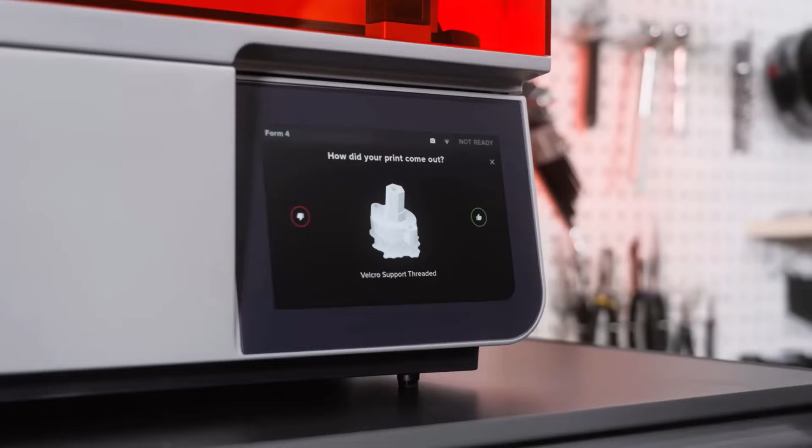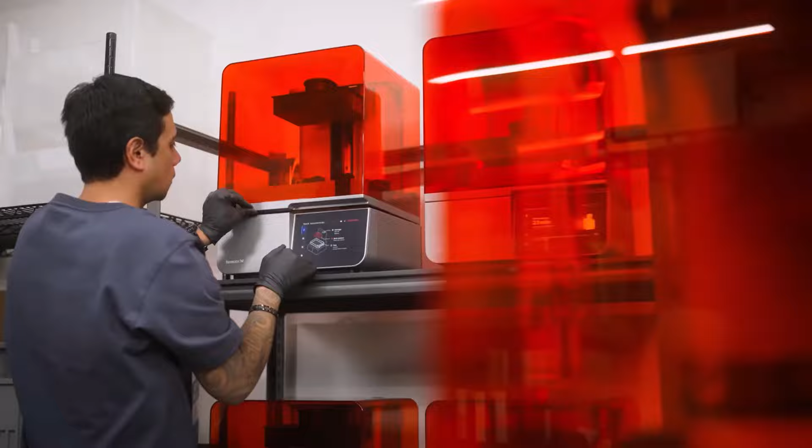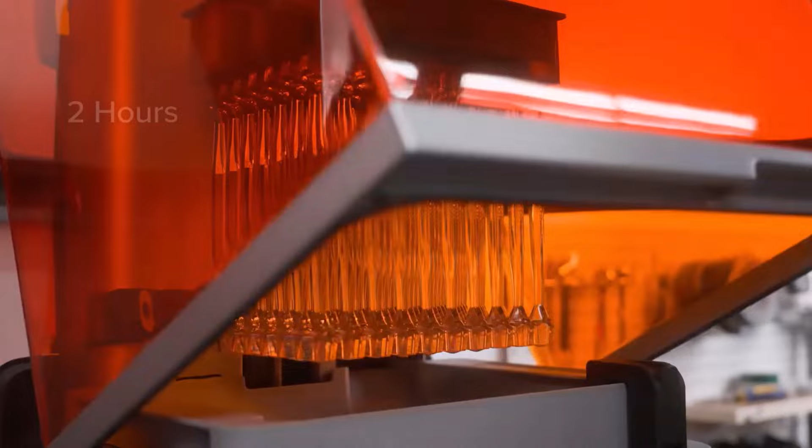Introducing Form 4. So fast, it will change the way you work, with most prints in under 2 hours. Iterate several times a day with a proprietary release texture, flexible film tank, and ultra-high optical power. Produce parts that always fit, rivaling injection molding with 50 micron pixels, advanced pixel smoothing, and light touch supports. Achieve an unmatched print success rate with validated print settings, precision heating, force sensing, debris detection, and remote monitoring. Tackle any problem with industry-leading materials, with an upgraded mixer and dispense system that support highly viscous and filled resins. And do it all with a workflow anyone can learn in 15 minutes, with instant material changes, comprehensive software, and automated post-processing. Enter a new era of performance, built on our next-generation low-force display print engine, featuring a high-power backlight unit, light processing unit 4, release texture, and a flexible film tank, delivering extreme speed, reliability, and print quality. Now, anyone can perfect their products, keep production running, or improve patient care. The tool you've been waiting for, Form 4.

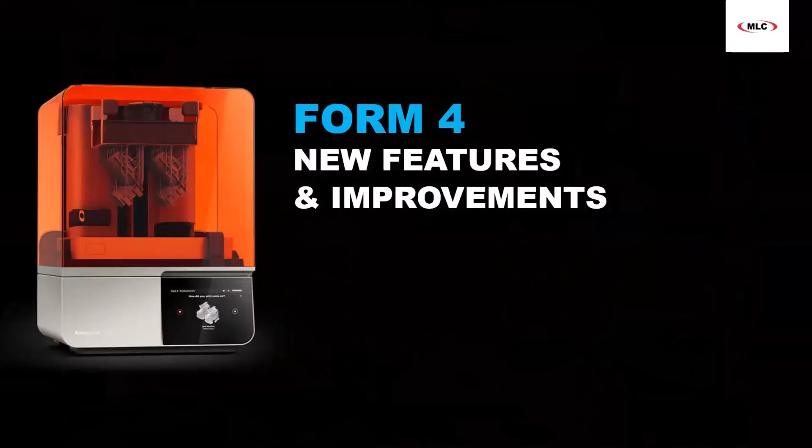So yeah, really good overview there. What I'd like to do is dive a little bit deeper into some of these new features and improvements with the Form 4. I think a great way to frame the perspective is by comparing some of these features with the previous generation printer, the Form 3 Plus.

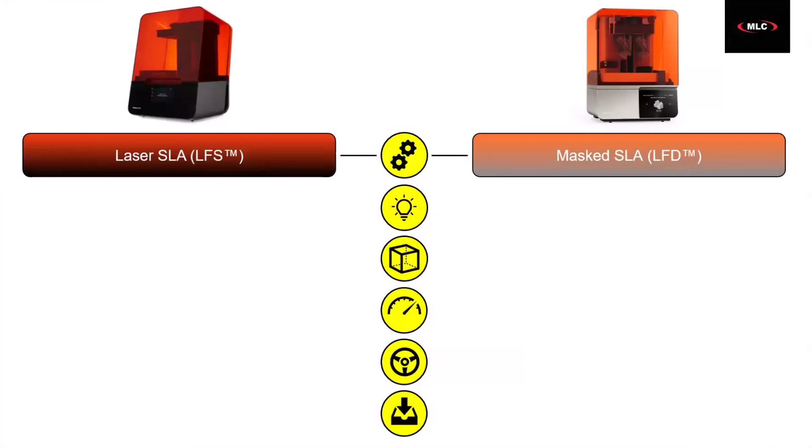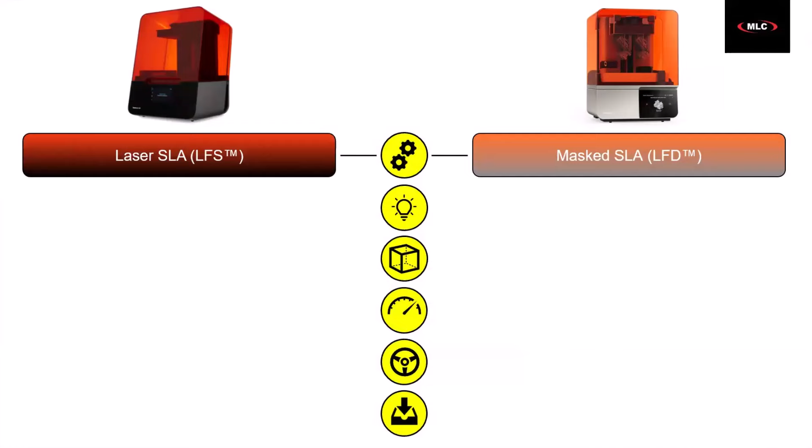So for starters, let's look at the print technology difference between these two machines. With the Form 3 Plus, we were looking at a laser-based SLA printer. And with the Form 4, we're looking at what we call masked SLA, or MSLA.

With the Form 3 Plus, it was a laser-based system of resin printing. So you had a laser that fired off, was reflected off a series of mirrors, and then it passed up through the bottom of a clear resin tank, and it cured that layer.

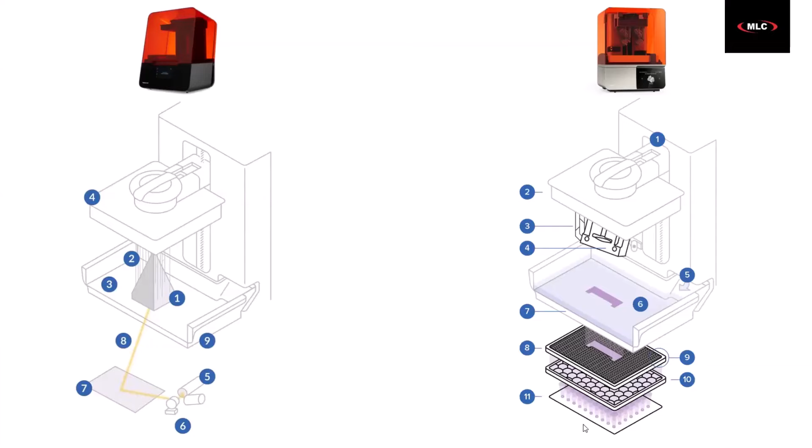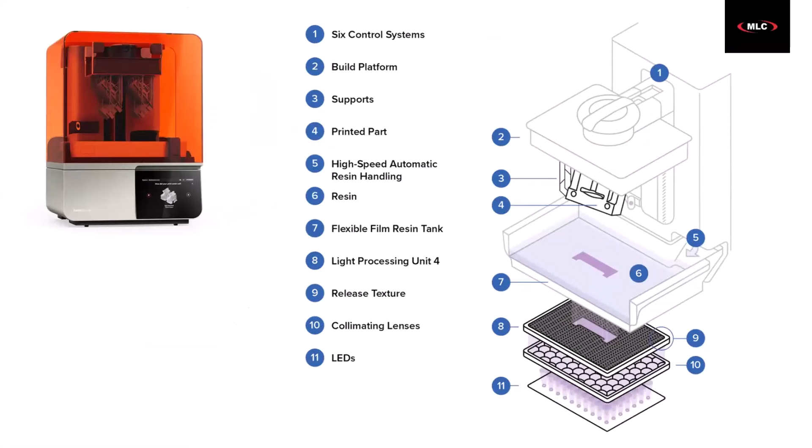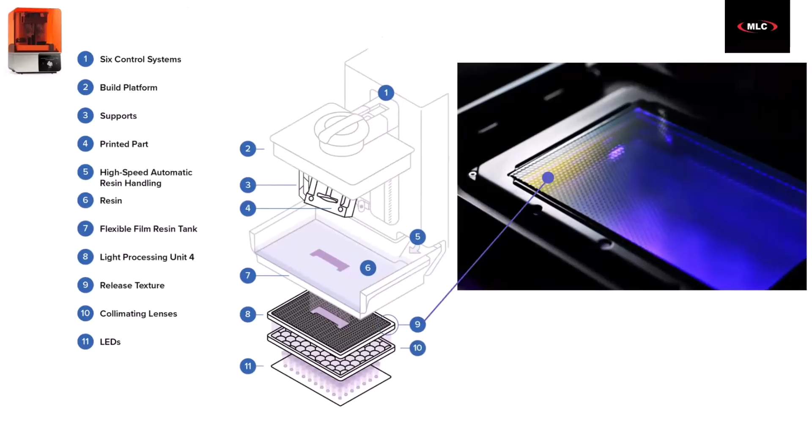So you can see that a little bit more clearly here. One thing I want to draw your attention to is this number 9 item, which says release texture. If we take a look at this here, this is a pretty brilliant innovation from Formlabs. The LCD screen actually has a rippled texture to it, kind of like a golf ball, if you will.

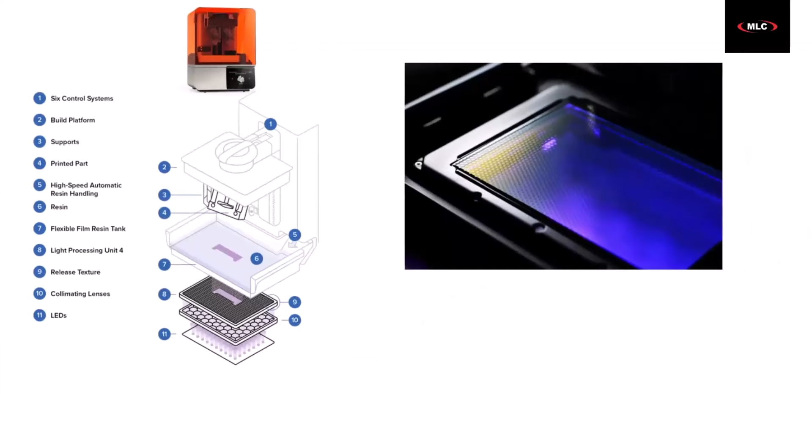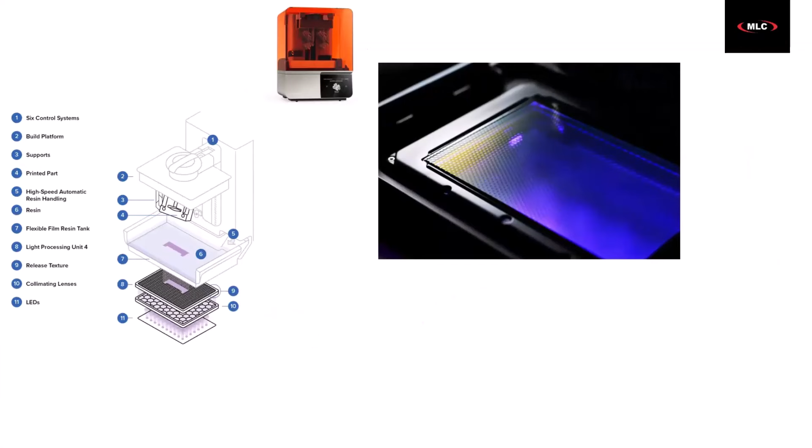And this is pretty significant because it has a pretty sizable impact on our peel forces. So if we look at a competitor's MSLA printer, usually one of these hobbyist grade machines, you can see their LCD screen is totally smooth.

So if we take a look at this from kind of a side view and a simplified diagram here, you can see that the rippled effect leaves these voids between the tank film, that clear tank film that rests on top of it, and the actual LCD screen itself. Versus the hobbyist printer, which just has two smooth surfaces in contact with each other.

The reason this release texture is important with the Form 4 is because during the print process, when this build platform lifts up, after the layer has finished curing, it'll peel that layer up off the bottom of the tank. And you can see this tank film is kind of warping, flexing during that peel process. And if we have two smooth surfaces in contact with each other, we can actually form a suction in between those two objects.

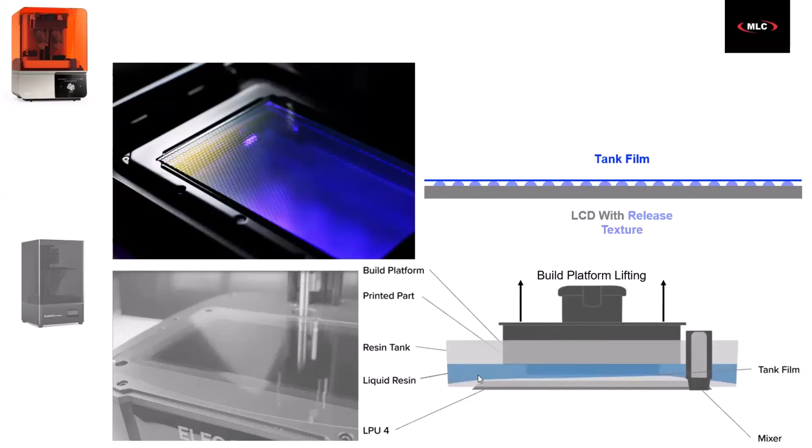This is analogous to a science experiment where if you place a piece of paper on a ruler and then throw an object on the end, the ruler will not fly off. The reason is because the piece of paper and the flat table form a suction between each other. So that paper is analogous to our tank film, and that smooth table is analogous to the very smooth LCD.

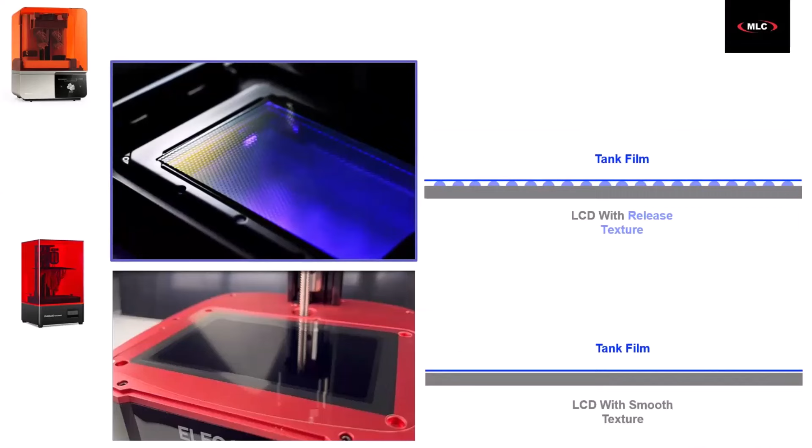So by implementing a release texture to the LCD on the Form 4, you get far lower peel forces than the hobbyist grade machines that have that smooth surface.

Now the light source, as we saw with the Form 4, is an array of UV LEDs, and our control point is that LCD screen. That LCD screen is a 4K LCD with 50 micron pixels. Before, with the Form 3, we had a laser that had an 85 micron spot diameter. So by controlling down to 50 micron pixel size, now we can obtain finer details, a smoother surface finish, and better accuracy on the Form 4.

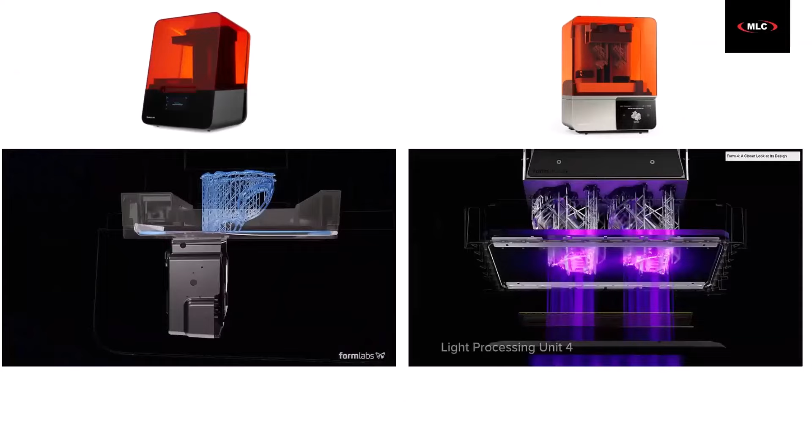Here you can really see the light processing unit differences in these rendered animations. Pretty incredible change of pace, and you get some great benefits with that masked version of SLA printing.

Now it's pretty impossible to not talk about build volume when a new printer gets released. So with the Form 4, instead of a 5.7 inch square build platform, you're looking at a more rectangular build platform. So you get extended dimension in the X, and you also get extended dimension in the Z axis.

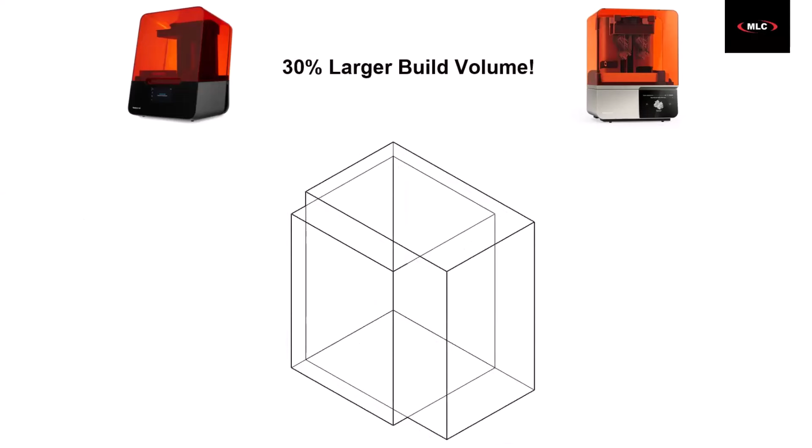If we take a look at our two wireframe representations of our build volumes and piece them together, you can see where you get that extended dimension. So 30% larger build volume as a result.

Now, one of the party pieces with masked SLA printing is the enhanced speed that you get. With Form 4, Formlabs has published that their average speed is about 40 millimeters per hour. So you're looking at 3.5 times faster speeds than what you got on the third generation of printer.

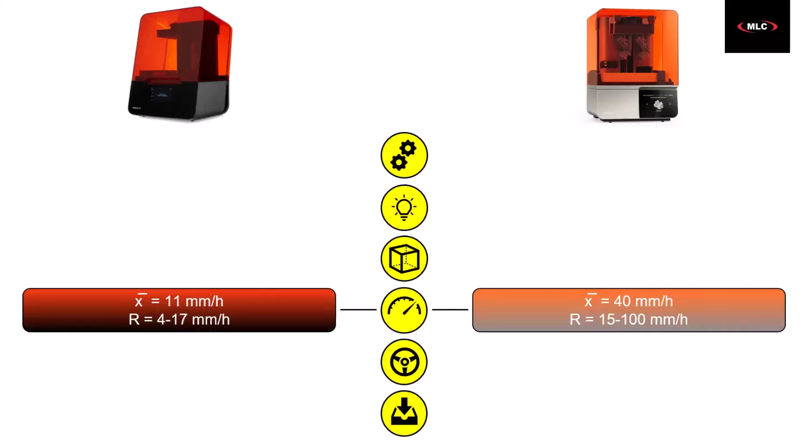The reason you get faster speeds - I threw together this little simplified animation using some Lego plates. With the Form 3, you can see how we're having to use that laser to trace out the entire layer from left to right or right to left. But because we have a high-powered source of light and an LCD screen, we can very quickly draw out that cross-sectional area just by turning on and off the pixels. We can cure an entire layer in just a matter of a few seconds because of that.

So that's really where you get the majority of those speed improvements, through that different technology there.

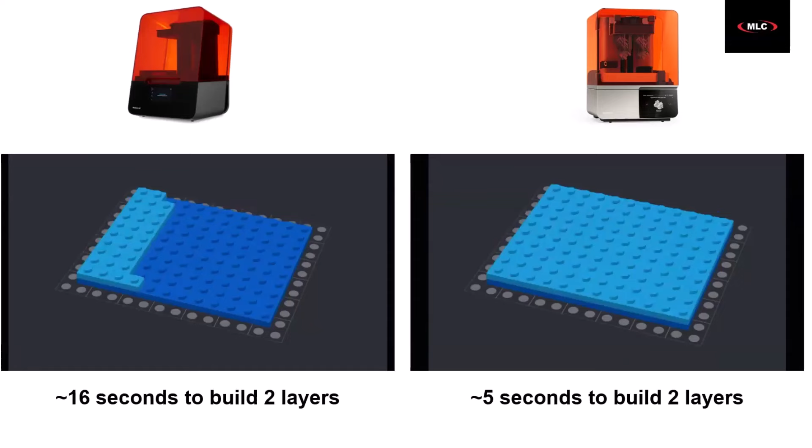Looking at a more realistic case, if you take this bracket piece on the Form 3 Plus and place it on the build platform, you can get 4 of these brackets on a single build. But with the Form 3, you're looking at a print time of about 12.5 hours, which means if you start that job when you get to work, it's not going to be done until the next day. By the time you get in the next day, it'll be ready. So that only means you're only going to get 4 parts in a single workday.

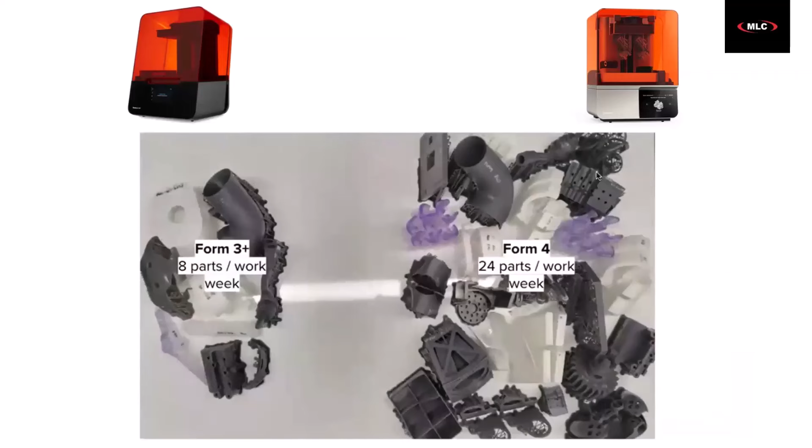And if we look at that from a weekly standpoint, you're going to see that same level of throughput, much, much higher.

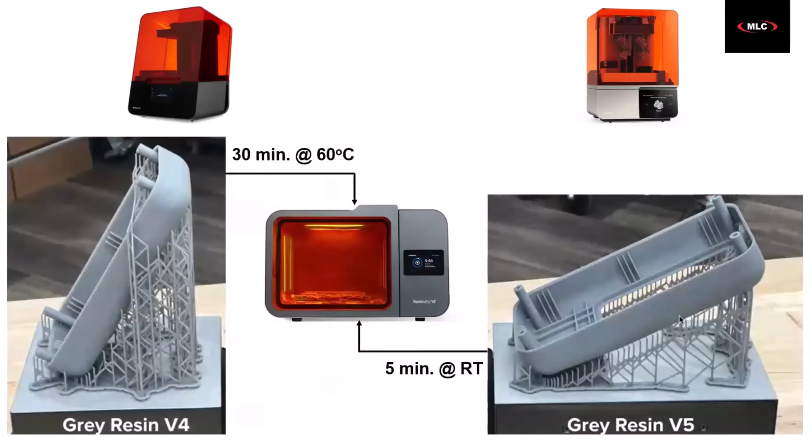Now, probably my favorite improvement with the Form 4 is some of the impacts that it has downstream. We have a very high intensity light source with the Form 4, and what that means is that while we're printing, we are curing the part more effectively during the print process in the Form 4 over the Form 3. So after the part's finished washing and drying, and we throw it into our cure oven, our cure process can be shorter. We have a stronger green state part, so the cure process is shorter.

Beforehand, with a general purpose resin like gray, we were looking at a 30-minute UV cure at 60 degrees Celsius. There's a little bit of temperature ramp up and cool down on either end, so maybe it was closer to 40 or 45 minutes in total. Now with the Form 4 and its general purpose resin, you're looking at a 5-minute UV cure, occurring at room temperature. There's actually no temperature ramp up or cool down cycle per Formlabs recommendations. So not only are you getting faster prints, but a faster cure process in addition, which is pretty incredible.

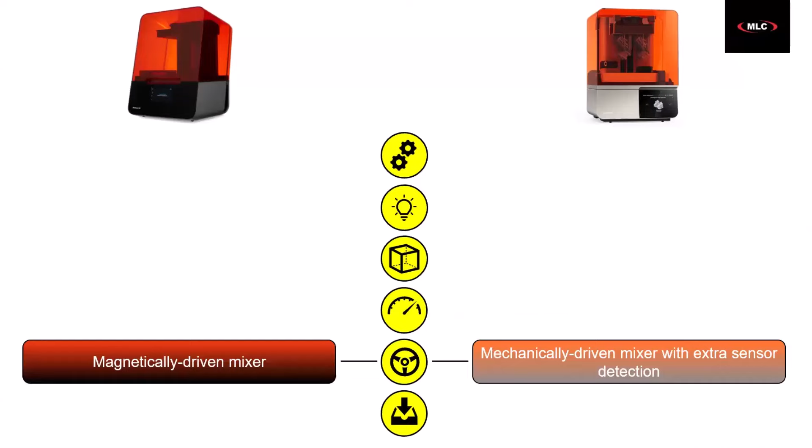The mixer with the Form 4 is no longer magnetically driven, now it's mechanically driven. The mixer slots into an attachment point, and that attachment point slides on a linear rail that's driven by a belt and a motor. So if you are printing with more viscous materials, there's no longer a risk of mixer decoupling. Also, the mixing process is extremely fast, which is another thing that contributes to the faster print times. And because it's mechanically driven, there are a couple of sensors built in that we'll take a look at a little bit later and see what improvements result from that.

A further improvement was with the resin tank. Unlike the Form 3, the Form 4's resin tank no longer has that black seal that runs around the internal perimeter. That black seal sometimes would experience degradation with some of the more caustic or abrasive, high performance engineering resins. So now, because that seal is no longer present, you get a more uniform expected expiration across the entire suite of Formlabs resins. And that expiration is right about 75,000 layers.

For instance, if you have experience printing rigid 10K on the Form 3 or the 3L, you know that when you load that material into the tank and insert it into the printer, you have 75 days of resin, or 250 print hours, before that tank expires. But with the Form 4, that tank has a uniform expiration across all the materials. So about 75,000 layers, whether you're printing in 10K, Tough 2000, Flexible 80A, or any of the general purpose materials. So that's pretty great.

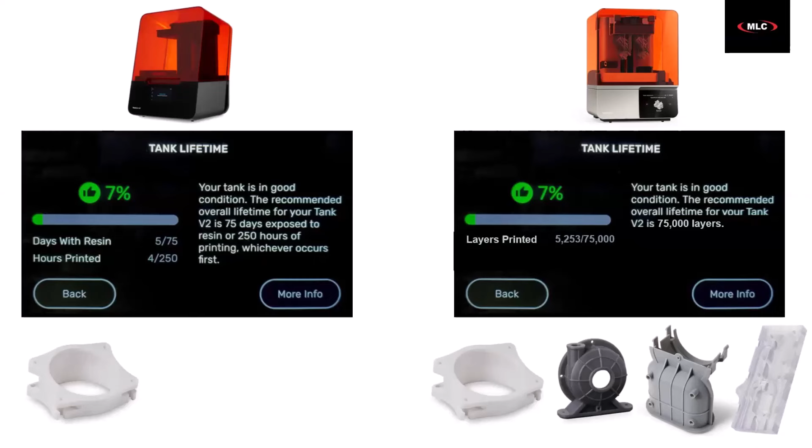Now, you may have seen from some of the previous slides where I had a comparison between Form 3 versus Form 4, and maybe one had the V4 resin, gray V4 versus gray V5. The reason for that is with the release of the Form 4, Formlabs launched a whole suite of newest iterations of their general purpose materials. When I talk about general purpose materials, I'm talking about gray, white, black, gray pro, clear, color, those materials. Formlabs went and took those materials and updated them, improving their mechanical properties and their aesthetic.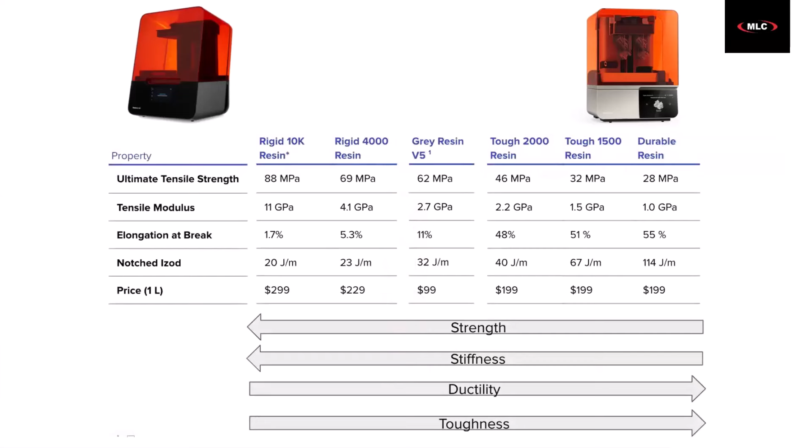If you take a look at gray V5, for instance, you can see we have a number of engineering materials listed here. Gray V5 kind of sits somewhere in between Tough 2000 and Rigid 4000 in terms of its mechanical properties. So now you're taking a material that's usually used for looks-like, feels-like prototypes, and because you've enhanced the mechanical properties, now you can branch into some of the more functional applications with this material.

Now, we talked about the mechanical property improvements. If we look at aesthetics, I think the clearest way, pun intended, you can see the improvements is with Clear V5. There's been aesthetic improvements with the gray, white, and black too, making that color a little richer, but with clear, it's the most apparent. Unlike Clear V4, there's not as much yellowing post-cure. It's a much more optically clear material. Vast improvement there.

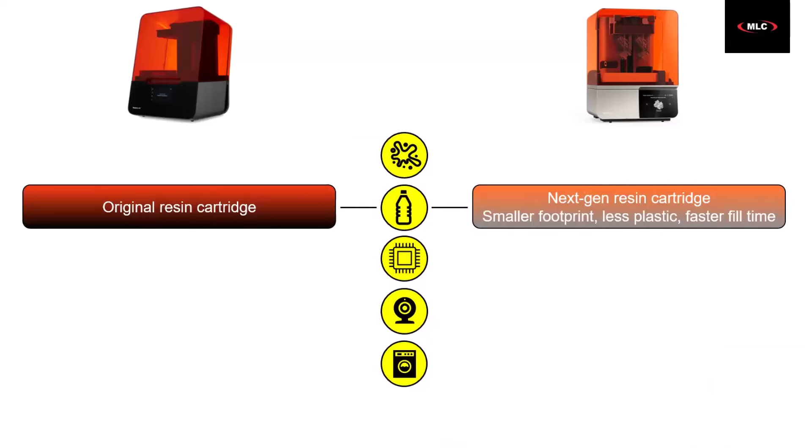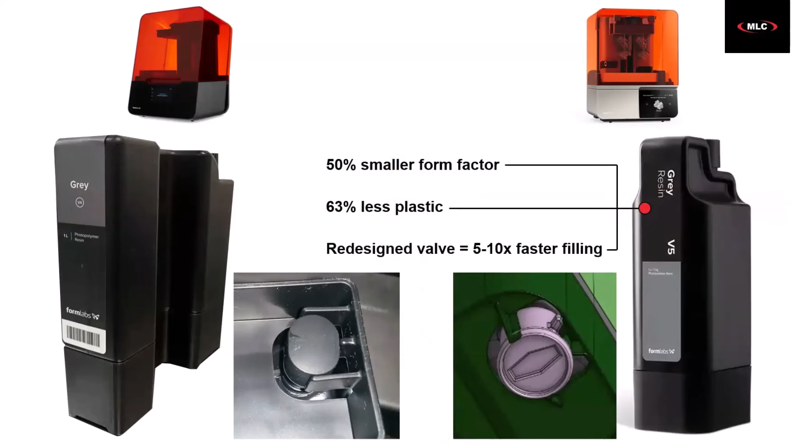Now, beyond just improvements with the resin, there's also been improvements with the resin cartridges. The cartridges now have more of a square footprint rather than the longer rectangular footprint, so you get a smaller form factor, which is great for those of you with space restrictions. It uses 63% less plastic in the cartridge, which helps contribute to the lower cost of the resin, as well as helps with Formlabs' own sustainability goals for the year.

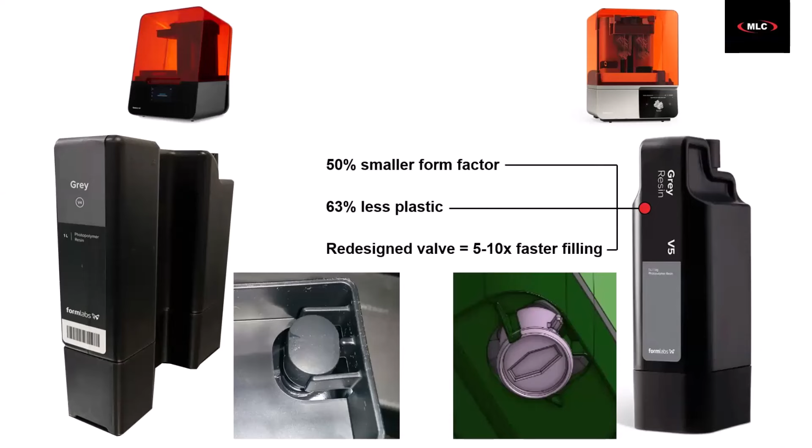And at the bottom of the cartridge, there's been a redesign to the bite valve, meaning it's now 5 to 10 times faster at filling your resin tank. For those of you using more viscous materials like Rigid 10K, that's going to be a pretty significant improvement for you guys.

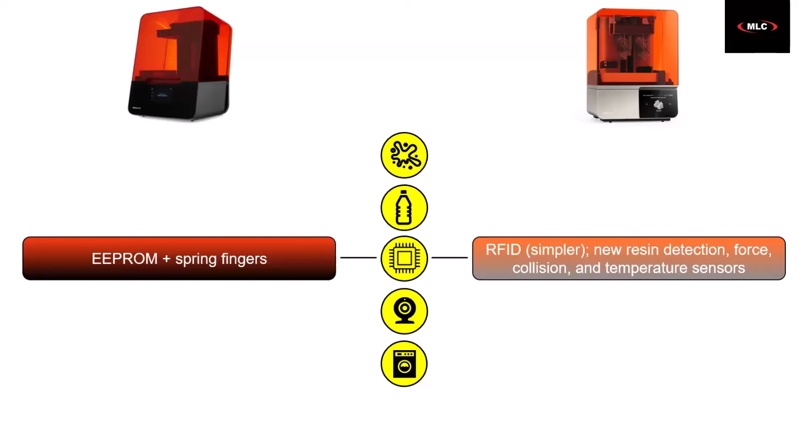Now, going over into some of the electronic features, there are 6 new intelligent systems built into the Form 4, in the form of various sensors and the way we're heating the resin—force sensors, things like that—as well as consumable detection. So now we're going to an RFID system. Before it was spring fingers, which could get deformed, requiring maintenance. Now, because it's RFID, it's just a simple label. It's a simpler system with less moving parts, which is probably the takeaway of this presentation: the Form 4 has less moving parts, but it's more reliable and faster. It's an overall pretty massive upgrade.

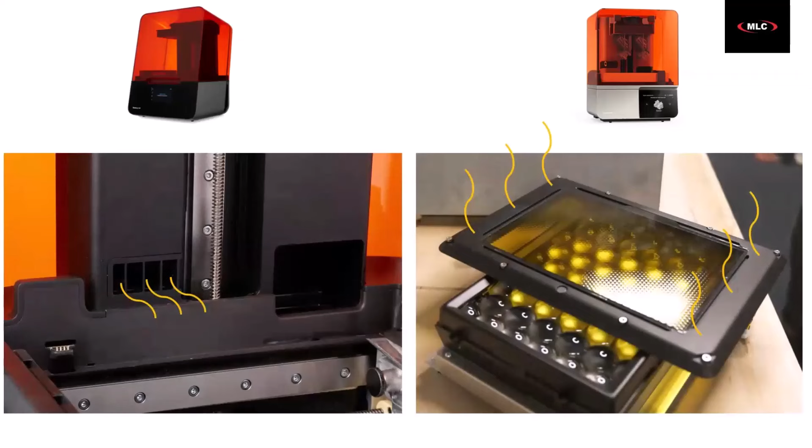In terms of resin heating, before, with the Form 3, you're looking at an indirect heating system—warm air being blown over the top of the resin. Now with the Form 4, you have heating elements on either side of the LCD screen, and that heat is transferred directly into the bottom of the resin tank. There are sensors applied to those heaters, as well as resin temperature sensors, to make sure we're heating that resin exactly where it needs to be, so we can get the most successful prints as a result.

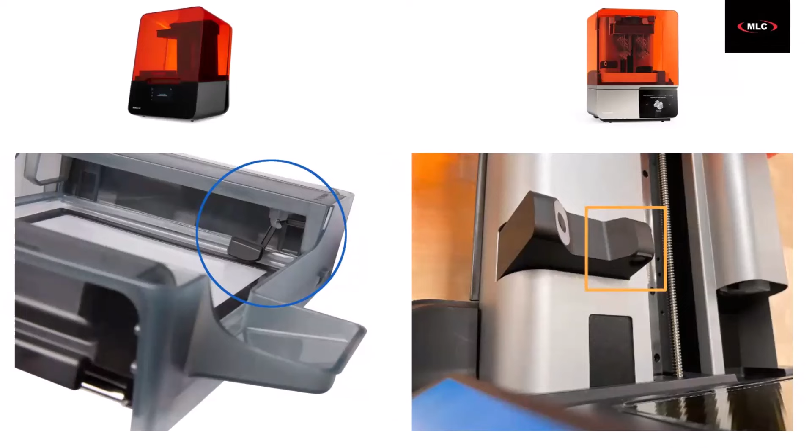In terms of determining how much resin is in the tank, before it was more of an analog system. Now we've incorporated the success of the level sense that we have in the Form 3L and brought it into the Form 4. So now it's all just signals fired down into the resin to determine that resin level height. It's been very successful for the Form 3L, and it's a simpler system that's been incorporated successfully into the Form 4.

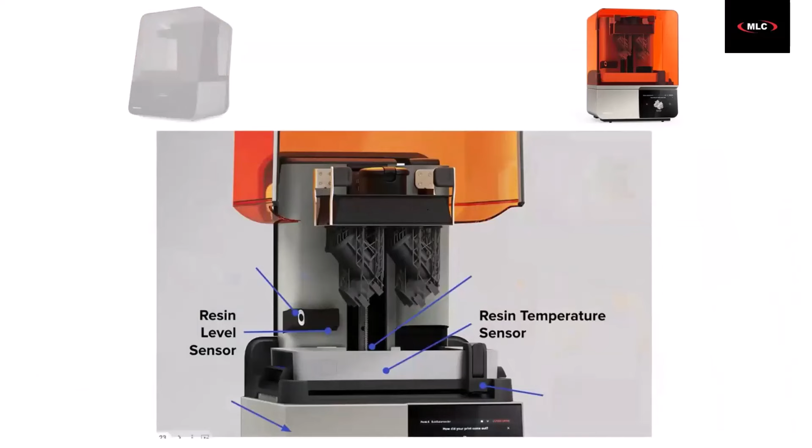So we looked at that resin level sensor just previously, and we took a look at the resin temperature sensor and how the Form 4 is heating that resin. In addition to that, there's a sensor built into the mixer—I kind of hinted at this earlier. Because that mixer is mechanically driven, there's a sensor that can now determine any collisions. So if you were to have a print failure with debris in the resin tank, when that mixer goes to mix from left to right, it can collide with that debris and let the printer know something's going on, pause the print, and notify you to come deal with it.

In addition, there is a force sensor built into the Z-axis tower of the Form 4. That force sensor primarily detects the success of a peel force, or proper peeling process. That's critical because you want a successful peel to tell the printer the print's going properly. Beyond that, it's also determining when the peel force has finished, so the printer can submerge the part back into the resin tank and start the next layer, minimizing downtime between layers and contributing to the overall speed of the Form 4.

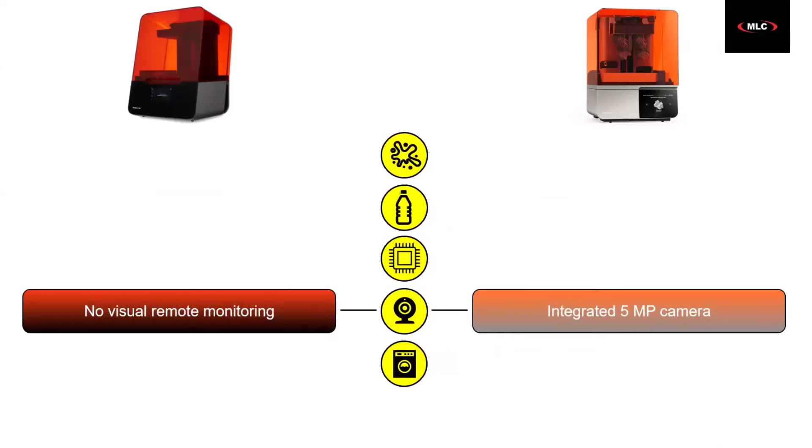And lastly, you probably noticed this in that promotional video, maybe some of the images I've shared. There is a camera integrated into the build enclosure, a 5 megapixel camera with really good quality footage. This is primarily great for remote monitoring. If you have an important job and want to keep an eye on it after hours, or if it's printing overnight, being able to go into a dashboard and make sure the print is going okay is very valuable. Beforehand, we didn't have anything like that. The camera also has some pretty cool new features built into it, which we'll get into in the Q&A shortly.

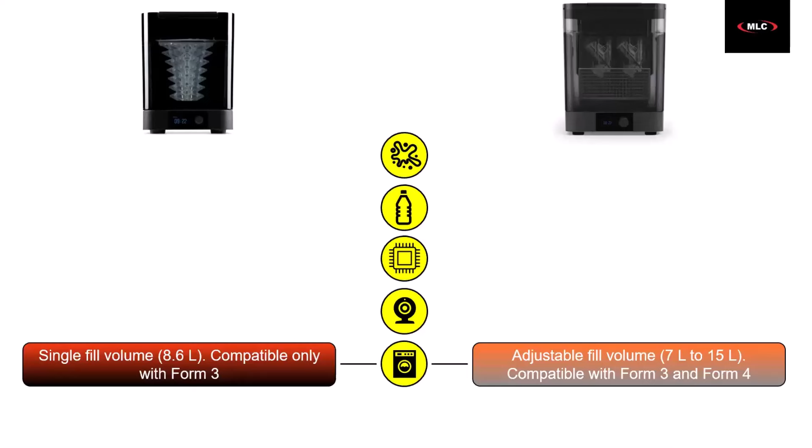So those are the major benefits of the Form 4 printer. What I'd like to talk about next is the 2nd generation wash, the newest Form Wash released with the Form 4. Because of the bigger build volume of the Form 4, Formlabs said we need a bigger wash to account for this bigger build volume. Not only did they account for a larger build volume, but they also added flexibility for varying solvent fills. The 2nd generation wash is compatible with both the Form 3 Plus and Form 4 build platforms.

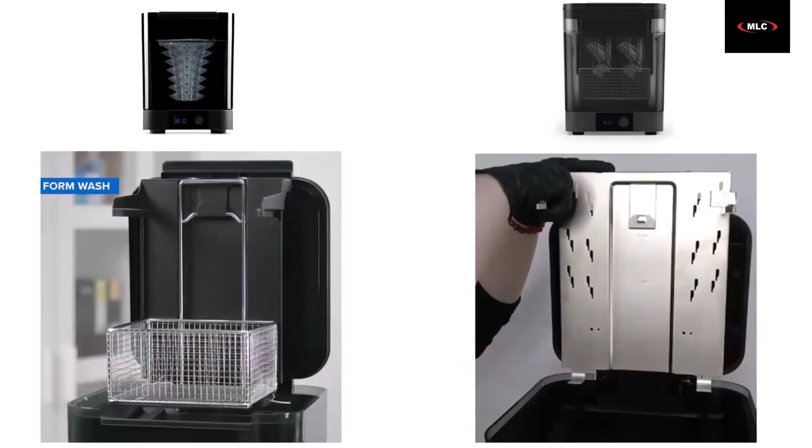In terms of compatibility, you can really see this clearly with the image on the right. You can see these outer slots, which are for the arms where the build platform will rest. The outer slots are for the larger x-axis of the Form 4 build platform, and the inner slots are for the smaller build platform of the Form 3 Plus.

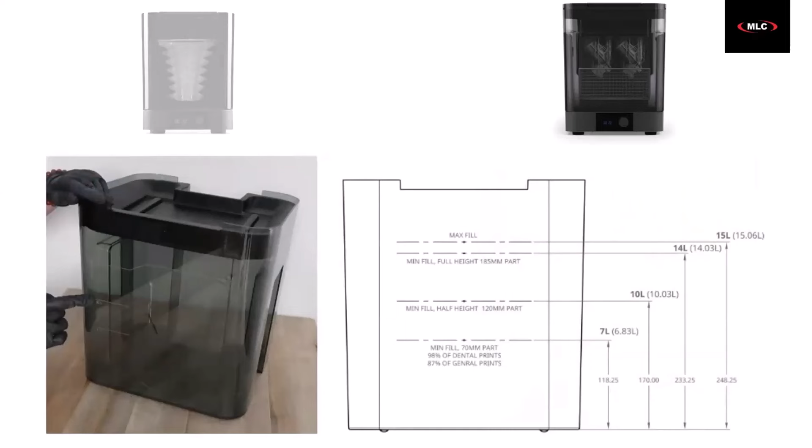You'll also notice there are 3 tiers: a top tier, an intermediary tier, and a lower tier. The lower tier is for lower solvent fills, all the way up to your max solvent fill with the upper tier. You can see this clearly with the gradation lines added to the solvent wash bucket, so we have a 7-liter minimum fill up to a 15-liter maximum fill.

The reason Formlabs did this is because some customers don't print parts that are very tall, especially dental customers printing things like dentures and mouth forms. These aren't very tall on the z-axis, so being able to fill your wash to only about 7 liters means you're not using as much solvent. It's less saturated solvent to deal with when you replace it, giving that ease of use and flexibility.